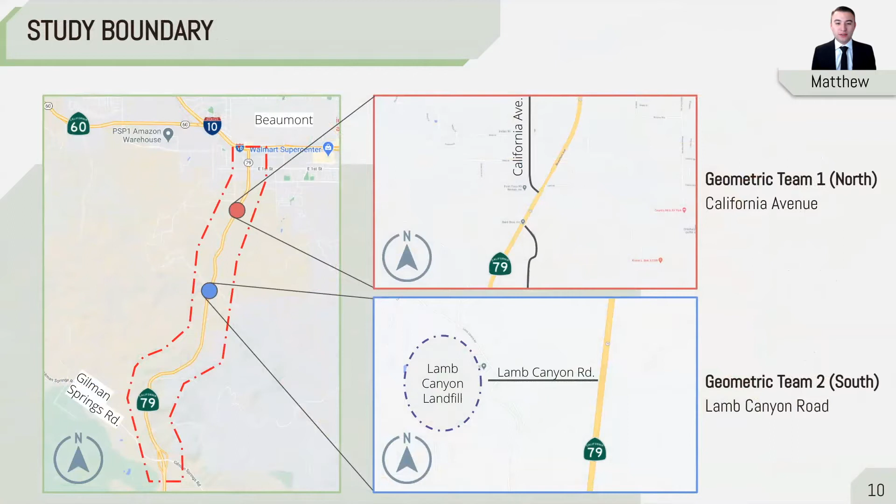More specifically, our study boundary is from East 1st Street to Gilman Springs Road along the SR-79. Through this corridor, the project focuses on intersections at California Avenue and Lamb Canyon Road. The project scope includes identifying and analyzing existing problems in the area, also known as purpose and needs. The SR-79 corridor serves as an alternate route to neighboring freeways such as the I-215 and I-10. Considering this and the projected population growth by 2040, congestion is expected to increase. The level of service of the corridor must be better than D by 2045. Furthermore, accident rates at California Avenue and Lamb Canyon Road require safety improvements to be made. Additionally, improvements are needed to current multimodal modes of transportation and environmental impacts for wildlife.

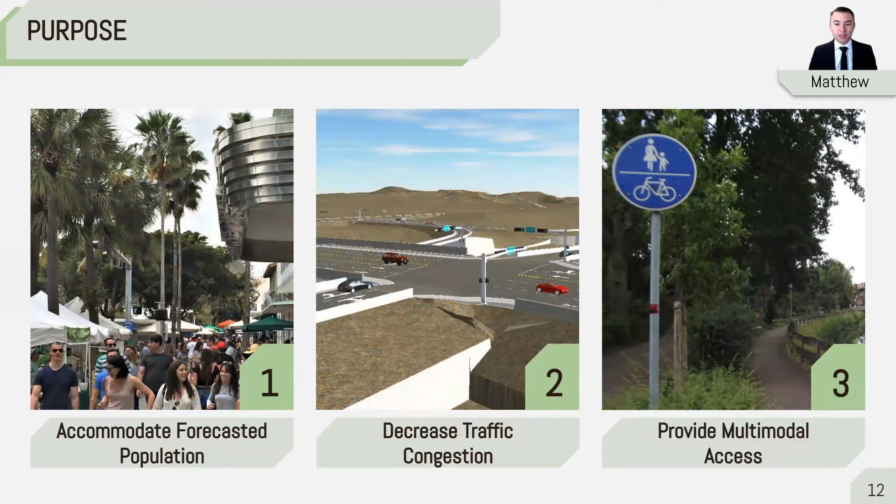Based on the needs, the purposes of this project include improvements to accessibility, capacity, and safety along the highway to better serve the cities of Beaumont, Hemet, San Jacinto, and Murrieta, thus reducing accidents along the corridor. The project also will decrease traffic congestion generated by the projected population growth in the region by 2045, as well as improve accessibility for cyclists and pedestrians along the corridor. This project also implemented different civil engineering disciplines such as surveying through digital terrain models, transportation through traffic models and simulations, as well as computer-aided drafting, structures through bridge designs, construction through our construction staging plan, and environmental considerations that Joselyn will now discuss. Thank you, Nicole.

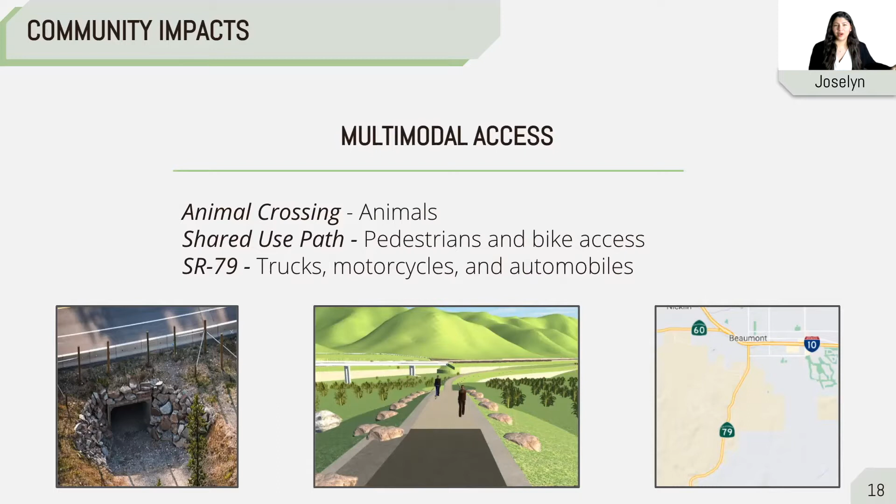The biological impacts were another component our team took into consideration when designing the SR-79 freeway conversion. Our site is surrounded by the Multiple Species Habitat Conservation Plan and PQP conserved land. Our project approximately impacts 6.1 acres of MSHCP land and 0.1 acres of PQP land. These lands provide habitats for multiple endangered and threatened animals, as well as rare plants.

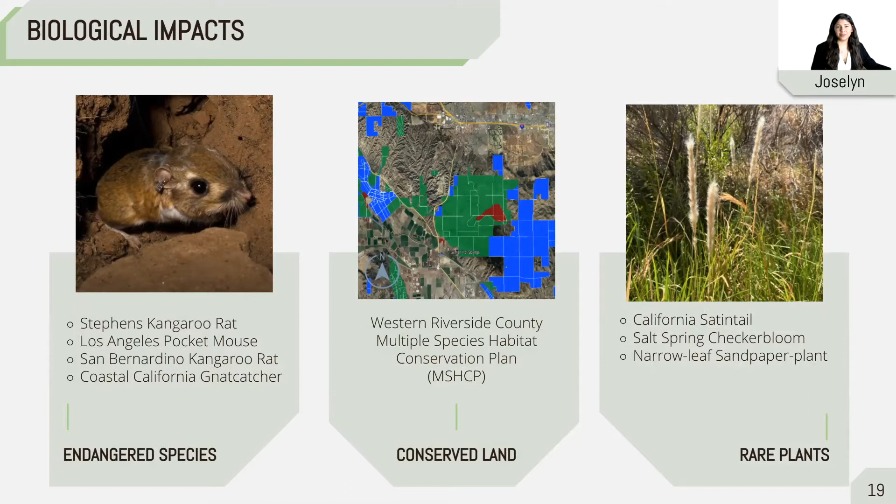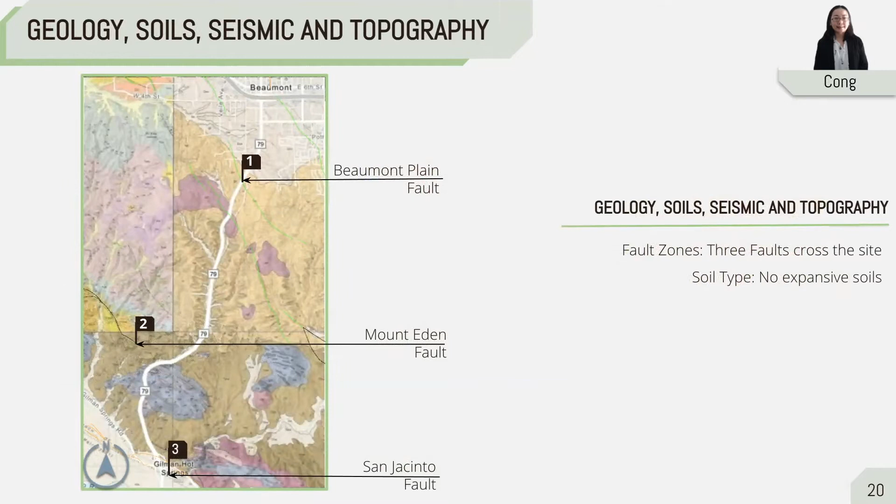Our project site consists mainly of rolling terrain. The image shows the surrounding area, soils, and fault line. No expansive soil appears to prevail around the sites. However, there are a couple of faults that appear within the sites. Therefore, we'll need to account for earthquakes in our structure designs and strengthen the existing soils.

For design aesthetics, the realignment and widening of the SR-79 through rolling terrain caused large cut and fill. Each earthwork quantity is summarized on the screen. This led our team to introduce retaining walls in areas where side slopes exceeded design requirements. Next, Joselyn will summarize our findings.

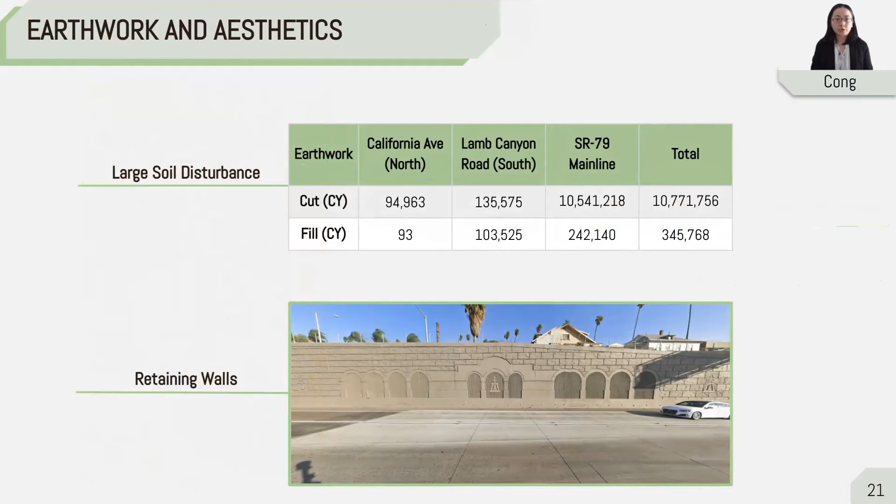Thanks, Joselyn. Before we get into the specifics of traffic analysis, we first introduce how we obtain the traffic data, parameters, and what the level of service is. The peak hour traffic volume was obtained from Caltrans traffic count sensors, the Riverside County traffic analysis model, and the Southern California Association of Governments model.

The annual growth rate for traffic volumes between 2020 and 2045 is 3.8%, which is based on the Caltrans 2017 Transportation Concept Report. The percentage of heavy vehicles on California Avenue and Lamb Canyon Road is 10.4% and 28%, respectively.

Level of service is used to determine how well a transportation facility is operating. 6 levels of service are defined from A to F, with level of service A representing the best operating conditions, and level of service F the worst. Next, Miguel will talk about the traffic analysis for existing and no-build condition.

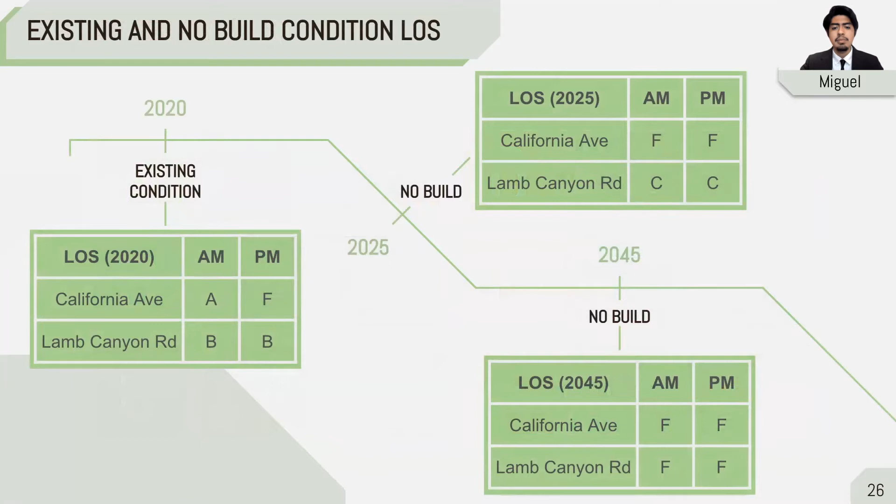This is a summary of the level of service for existing and no-build condition. Next, we will review the level of service for the existing conditions of the project. The existing geometry of State Route 79 was modeled using Synchro 10 to evaluate the current and no-build conditions for the years 2025 and 2045.

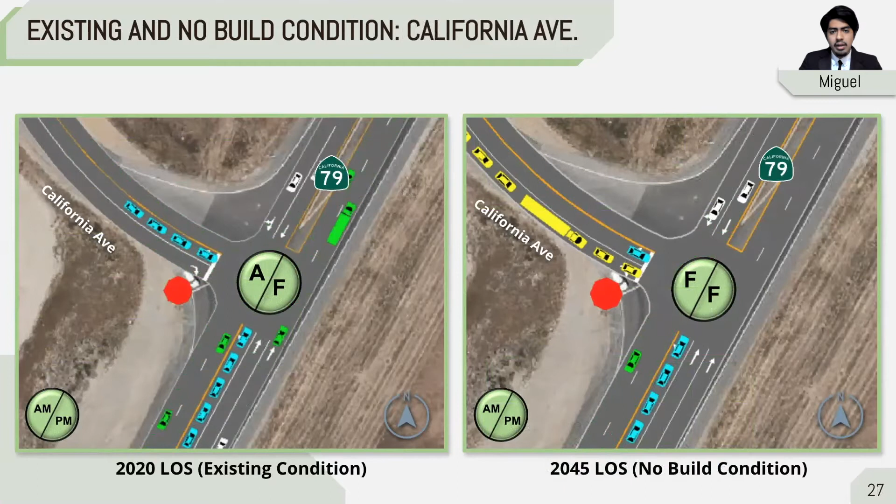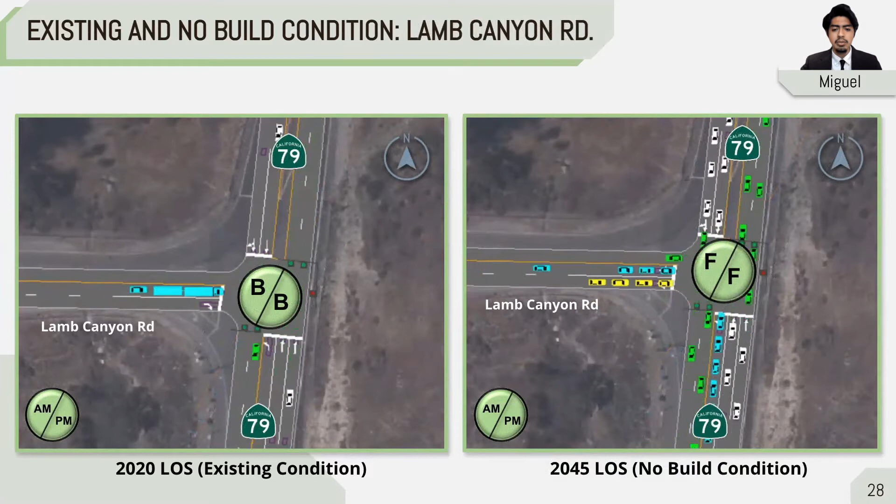The 2020 level of service was found to be A and F for California Avenue. Consequently, the 2045 level of service projection was F and F for California Avenue. For 2020, the existing intersection of Lamb Canyon Road and State Route 79 AM/PM level of service are B and B. Additionally, the 2045 AM/PM level of service projection was F and F for Lamb Canyon Road. Caesar and Ben will now discuss the geometric alternatives.

After environmental and traffic analysis, our geometric teams were able to develop feasible design alternatives for each interchange. We used design standards from the Highway Design Manual to ensure the safety of our designs, received industry guidance for best practices to improve our alternatives, and used professional programs such as MicroStation and InRoads to draft our designs.

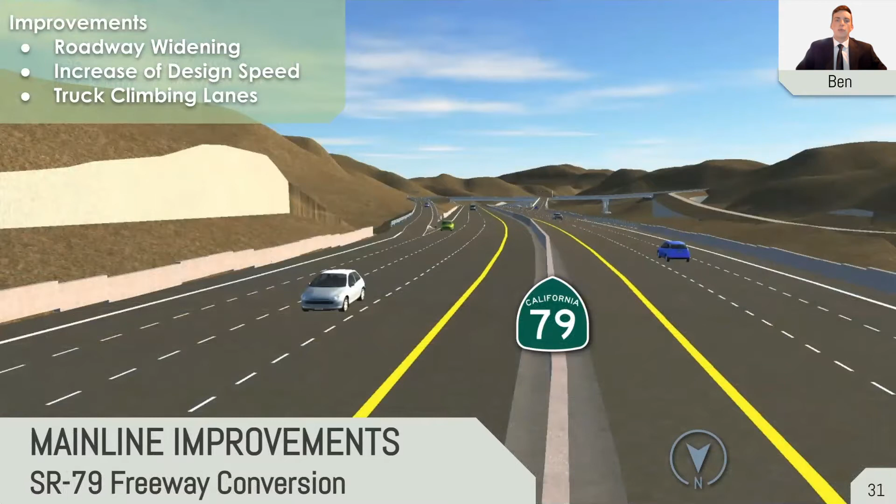This project will improve State Route 79 by converting it from a highway to an access-controlled freeway. We widened the roadway with the addition of 1 lane in each direction, increasing the capacity of the facility. We also realigned the 79 both horizontally and vertically so that the design speed of the roadway, according to current Caltrans design standards, is increased from 55 to 70 miles per hour. Finally, we added a truck climbing lane along portions of the northbound 79 where the grade exceeds 2%.

Our team developed and designed 3 alternatives for the northern interchange at California Avenue and State Route 79. We designed each alternative with California Avenue as an overcrossing to State Route 79 while providing access for cars, bicycles, and pedestrians along California Avenue.

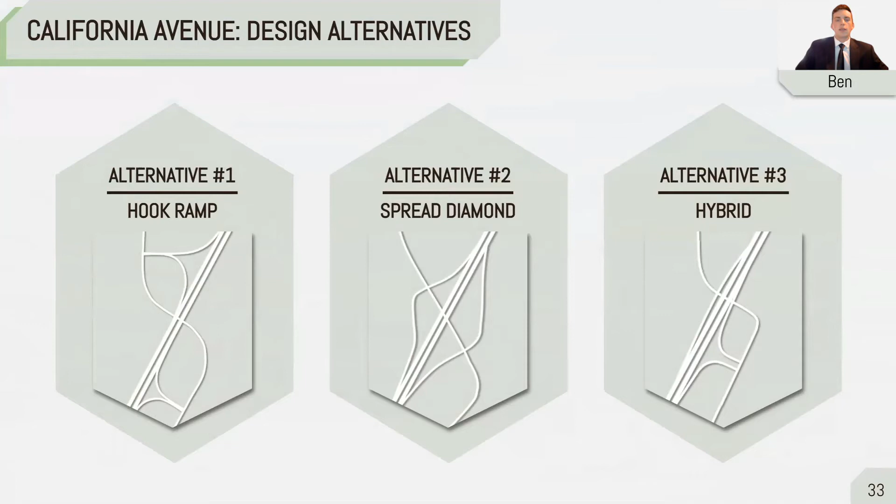Our first alternative is a hook ramp interchange. Our second alternative is a spread diamond, and our last alternative is a hybrid interchange incorporating elements of both the hook ramps and diamond design. I'll now pass it over to Nicole to discuss our first alternative. Our first alternative is the hook ramp interchange.

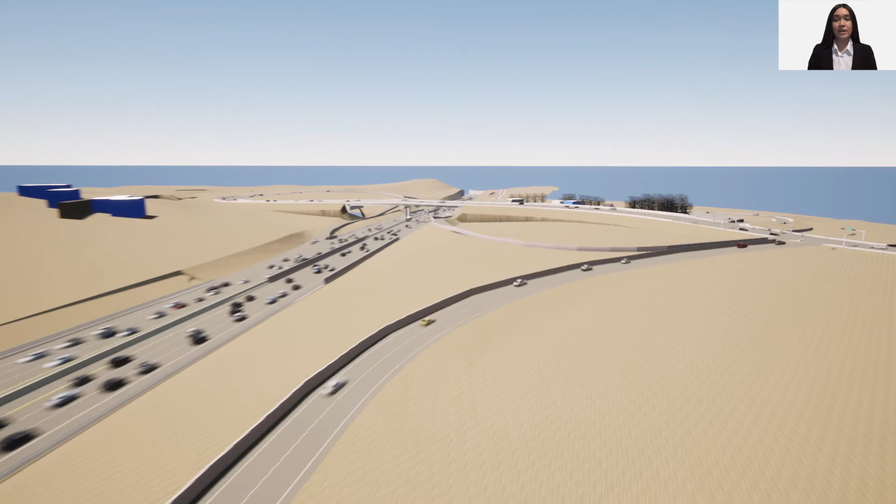The hook ramps interchange is generally designed when the freeway alignment runs parallel to the streets. In our design, only the southern portion of California Avenue runs parallel to State Route 79, while the northern portion maintains a 30-degree skewed angle. The proposed 4-lane bridge on California Avenue is designed nearly perpendicular to the 79, which minimizes the structure's cost. However, the hook ramp's design incorporates more drastic curves on the ramps than other designs.

The hook ramp alternative has 2 intersections and 4 ramps. For 2025, the southbound intersection AM and PM level of service are both A, and the northbound intersection AM and PM level of service are A and B. For 2045, the southbound intersection AM and PM level of service are A and B, and the northbound intersection AM and PM level of service are both B.

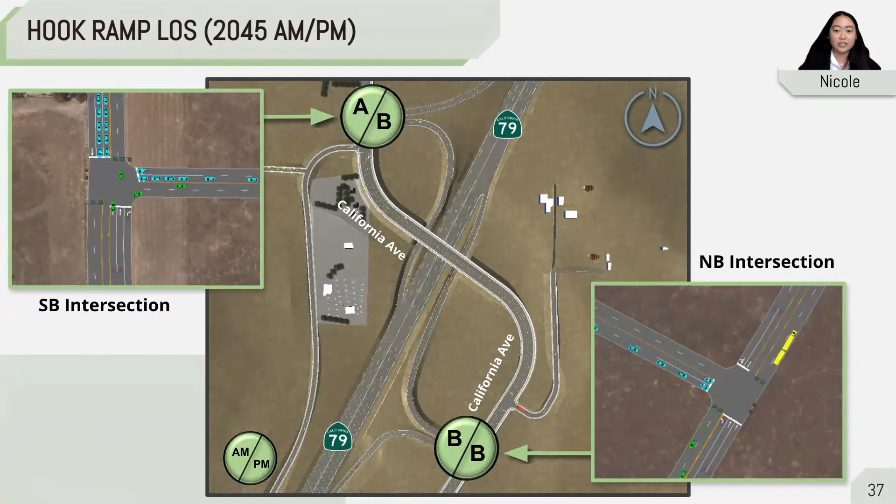For 2025, the southbound intersection AM and PM level of service are both A. The northbound intersection AM and PM level of service are both A as well. For 2045, the southbound intersection AM and PM level of service are B and C. The northbound intersection AM and PM level of service are both B.

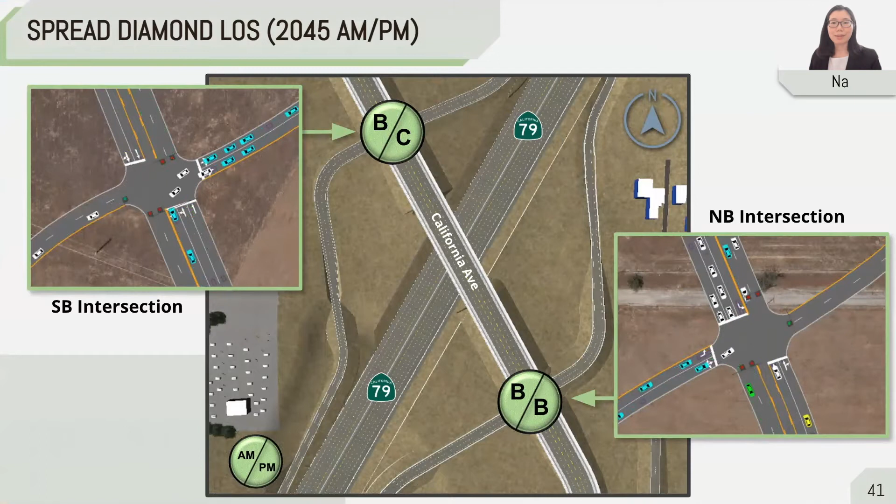Next, Miguel will talk about the hybrid alternative. Our third alternative is a hybrid interchange. This consists of hook ramps for the northbound ramps and a tight diamond for the southbound ramps. This alternative seeks to incorporate the near perpendicular bridge of the hook ramp alternative to decrease the structure's cost, along with diamond ramps on the western side of State Route 79 to minimize the right-of-way and environmental impact. However, this design doesn't meet drivers' expectations as well as the other 2 alternatives. This is due to the different types of ramps being implemented on each side of the bridge.

The hybrid interchange design has 2 intersections. For 2025, the southbound intersection AM and PM level of service are both B. The northbound intersection AM and PM level of service are both B as well. For 2045, the southbound intersection AM and PM level of service are B and B. The northbound intersection AM and PM level of service are both B.

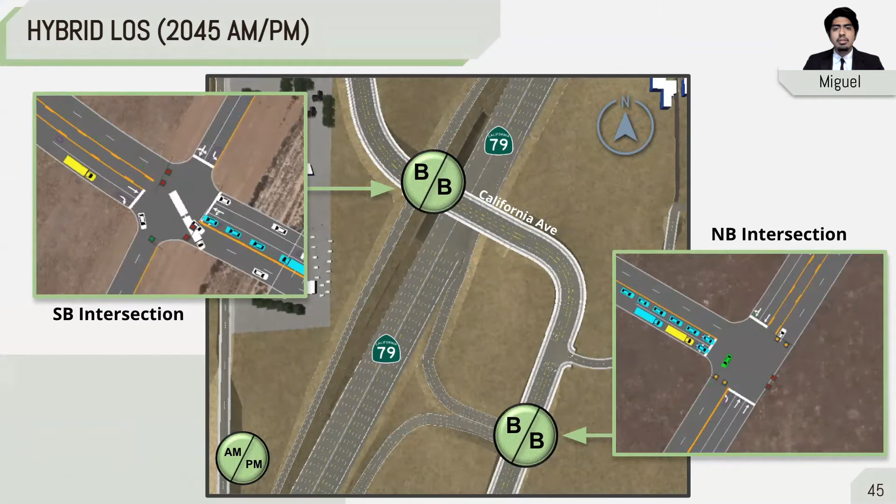Cesar will now discuss the Lamb Canyon design alternatives. Our team designed 3 alternatives for the interchange at Lamb Canyon Road and State Route 79, as well as a shared use path from Lamb Canyon Trailhead 1 to Gilman Springs Road. Our first alternative is a tight diamond. Our second alternative is a spread diamond hybrid, and our third alternative is a trumpet. I'll now pass it on to Arodi to discuss our first alternative.

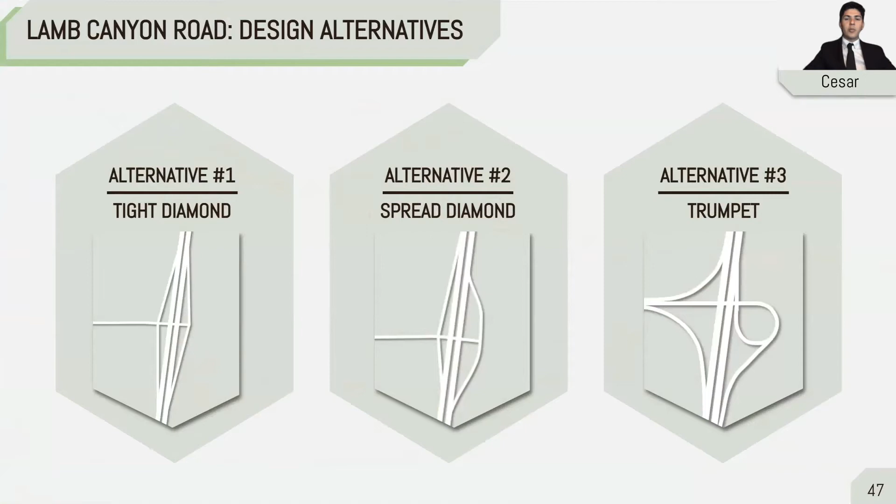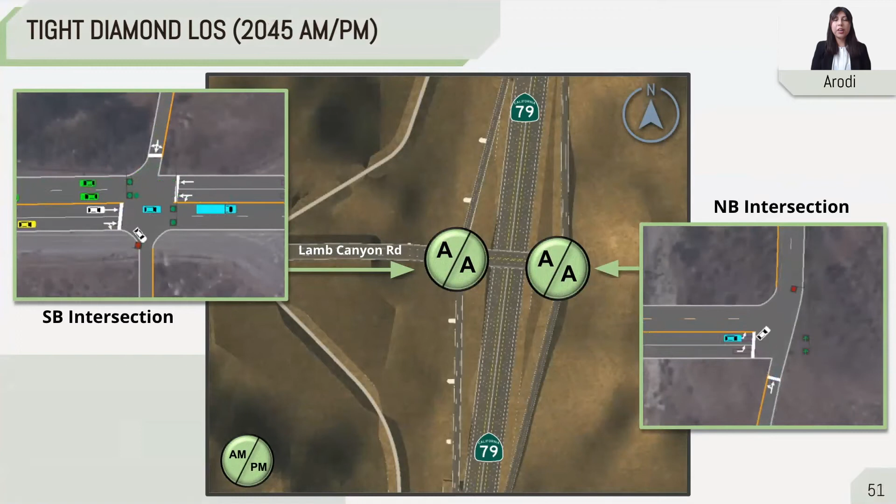The tight diamond is an alternative that meets driver expectations and requires minimum construction cost. It also allows for construction within limited right-of-way areas. It is a common, simple design alternative that provides familiarity to constructors. One challenge with this design, however, is that it can be difficult for future expansion. The southbound intersection AM and PM level of service are both A. The northbound intersection AM and PM level of service are also both A. For 2045, the southbound intersection AM and PM level of service are both A. The northbound intersection AM and PM level of service are both A as well.

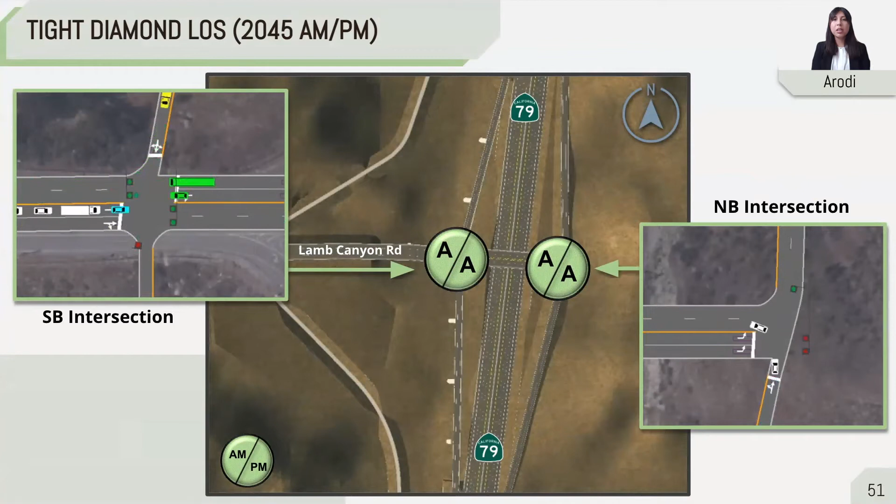Next, Raymond will discuss the spread diamond hybrid. The spread diamond hybrid has multiple advantages. The newly designed intersection allows for improved traffic flow due to added left turn movements on the northbound on-ramp. The interchange meets drivers' expectations and improves access to SR-79 by utilizing on and off ramps connecting to Lamb Canyon Road on the east and west sides. Cons to the spread diamond hybrid would be the limitations of expansion or widening on the northbound on-ramp due to the environmental constraints and mainline boundaries.

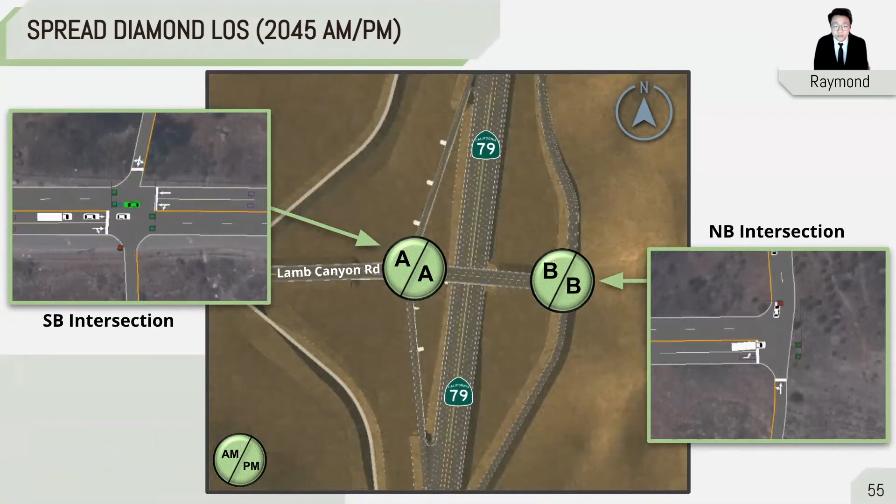The spread diamond alternative at Lamb Canyon Road will have two intersections and provide access to State Route 79 through the north and southbound ramps. Both intersections received an AM and PM level of service of A and A for 2025 traffic conditions. For the AM and PM 2045 traffic conditions, the southbound intersection received a level of service of A and A, while the northbound intersection received a level of service of B and B.

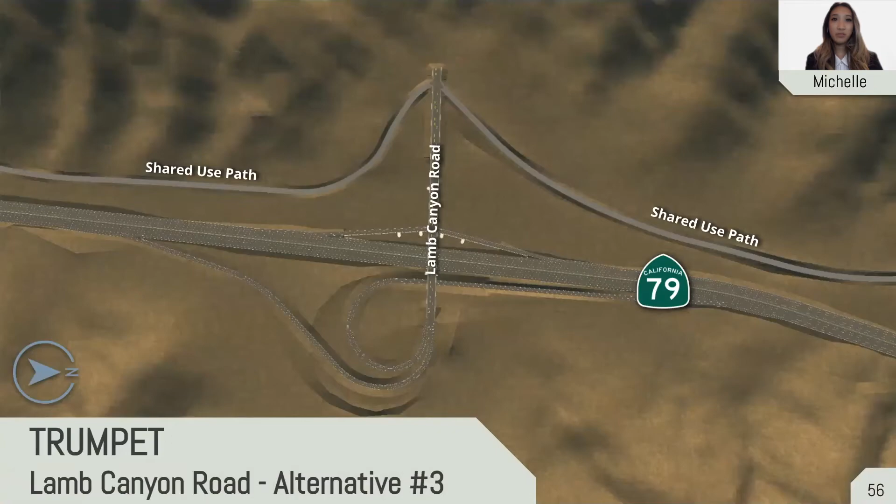Next, Michelle will discuss the trumpet alternative. The trumpet hybrid alternative consists of loop ramps on the northbound and a tight diamond design on the southbound side. Trumpets are most useful when implemented on three-legged interchanges where most traffic on the terminating highway is going the same direction. This trumpet design has free-flowing traffic in the northbound direction. However, a drawback can be that it is hard to expand on if needed in the future and that the loops require a lot of right-of-way acquisition.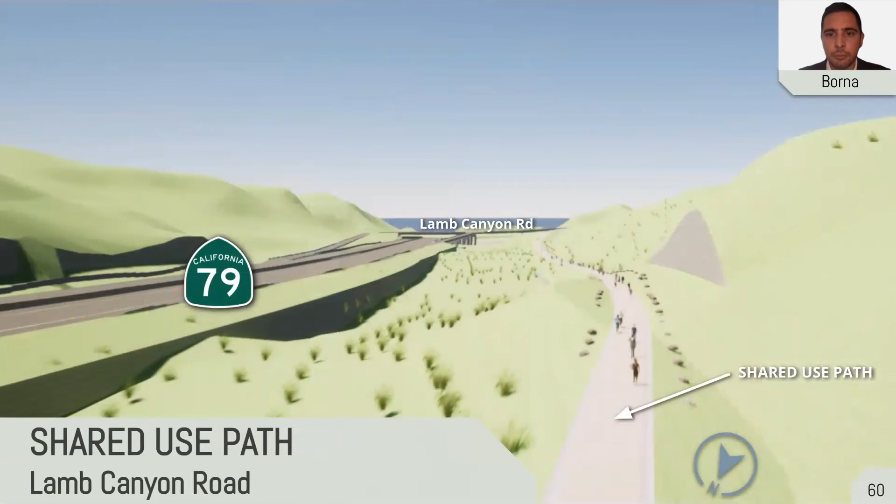A shared use path serves as part of a transportation circulation system and supports multiple recreation opportunities such as walking and bicycling. Due to the upcoming development of Beaumont and San Jacinto, the path would provide accessibility and ease of multimodal transportation between the two cities through Lamb Canyon. Currently, the existing condition does not provide a direct path accessible for pedestrians and bicyclists.

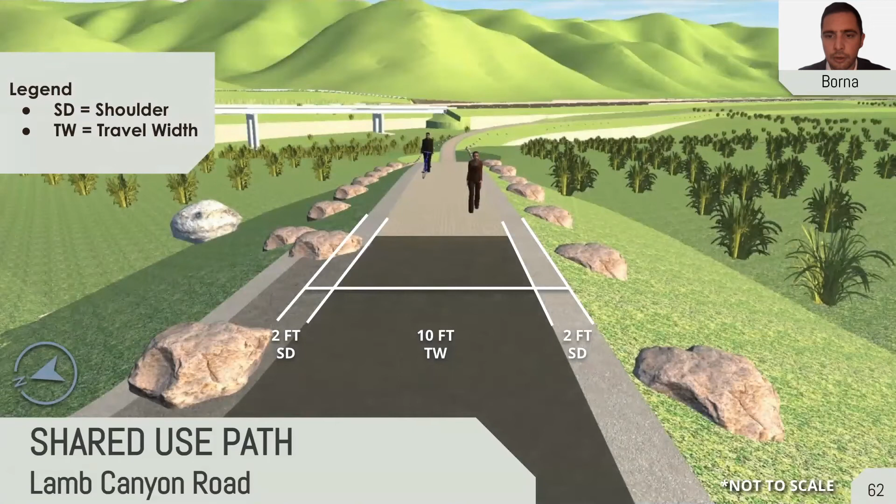The 10-foot wide, 3.2-mile long path extends from the Lamb Canyon trailhead just north of Lamb Canyon Road to Gilman Springs Road, parallel to SR-79. It will have a 5-foot travel lane in each direction with grade variations of 2 to 10%. Now I will turn it back to Nicole to discuss the benefit-cost ratio.

Thank you, Borna. The benefit-cost ratio is determined by the quantified benefits and costs of each alternative. The benefits of this project were calculated based on values for total vehicle delay reduction, total vehicle stop reduction, fuel consumption reduction, and emissions reduction for each alternative. These values were taken from the Synchro reports and calculated accordingly.

Furthermore, a cost estimate analysis was conducted based on the items shown here. The cost of each of these items was calculated for the current year cost and escalated to the project opening year cost. Based on these quantified values for benefit and cost for each alternative, the team was able to consider this in the decision matrix.

The weighted decision matrix for this project was created by the project development team in order to prevent selection bias when deciding our preferred alternatives at California Avenue and Lamb Canyon Road. The 10 categories included input from environmental, traffic, and geometric teams, and are ranked based on the following order in the slide. Our team then unanimously scored each alternative based on our project findings and our purpose and needs statement.

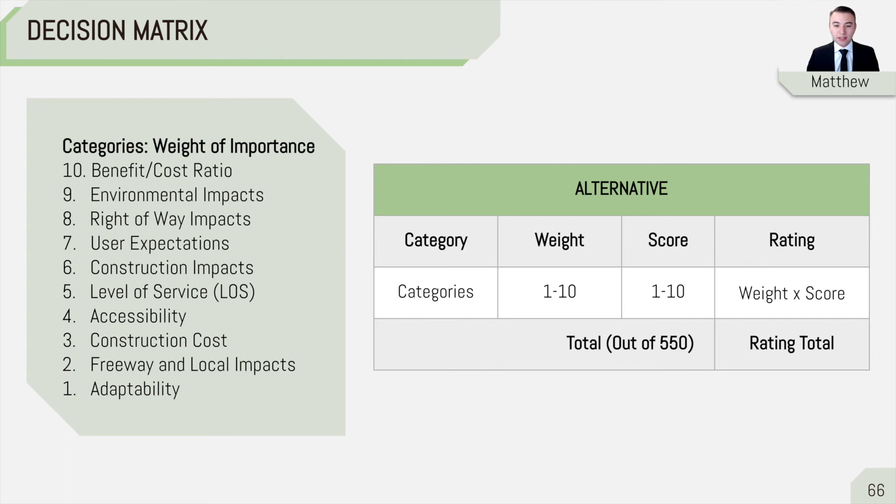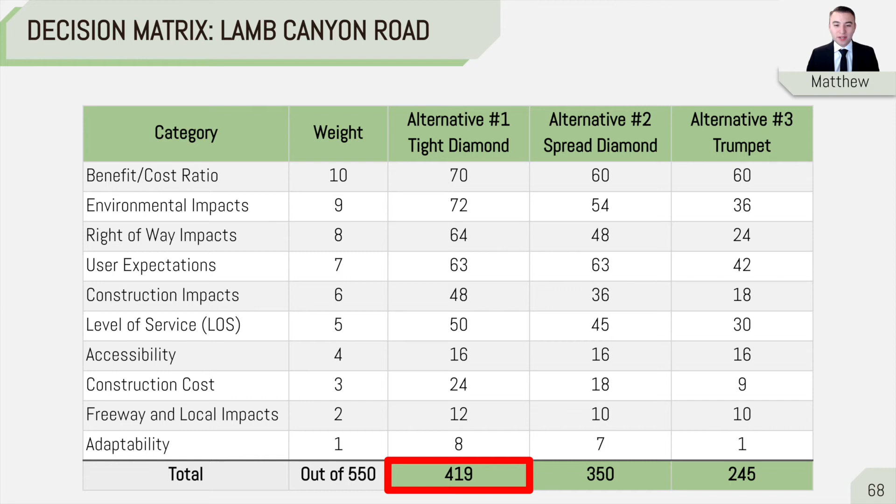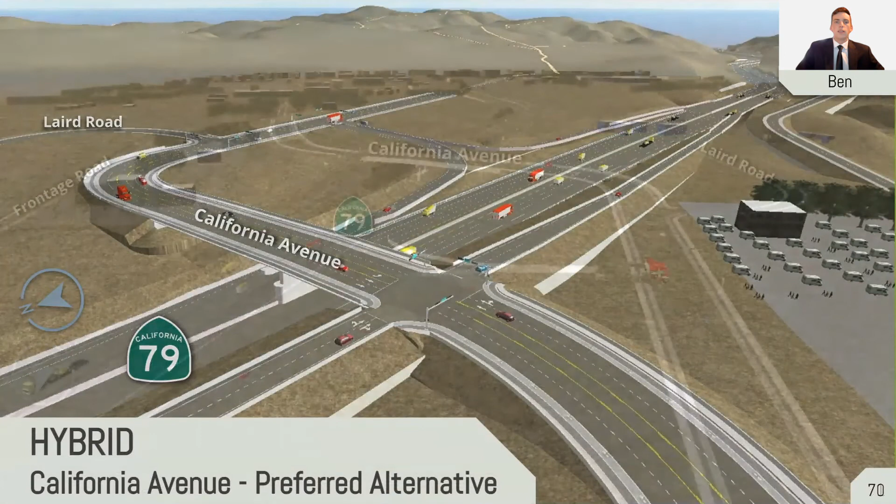The hybrid interchange was selected as the preferred alternative for California Avenue. This alternative best met the purpose and need of the project while also having the lowest construction cost and greatest benefit-cost ratio. The hybrid design also had a lower impact on right-of-way and environmental concerns. These factors led us to select the hybrid design as the preferred alternative.

For Lamb Canyon Road, our preferred alternative was the tight diamond. This alternative best met the purpose and need of our project. It impacted the conservation land the least while also having the greatest benefit-cost ratio and has the best level of service. I will now pass it on to Dean and Douglas to discuss the roadway sections of the main line as well as our preferred alternatives.

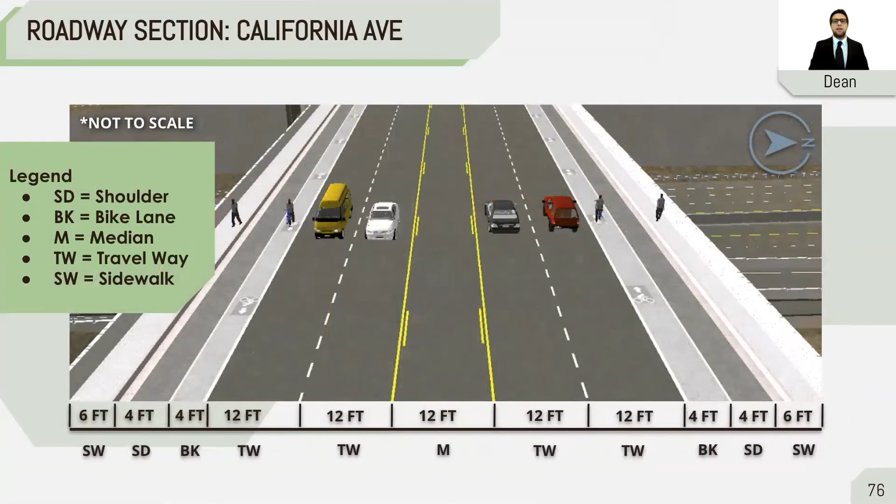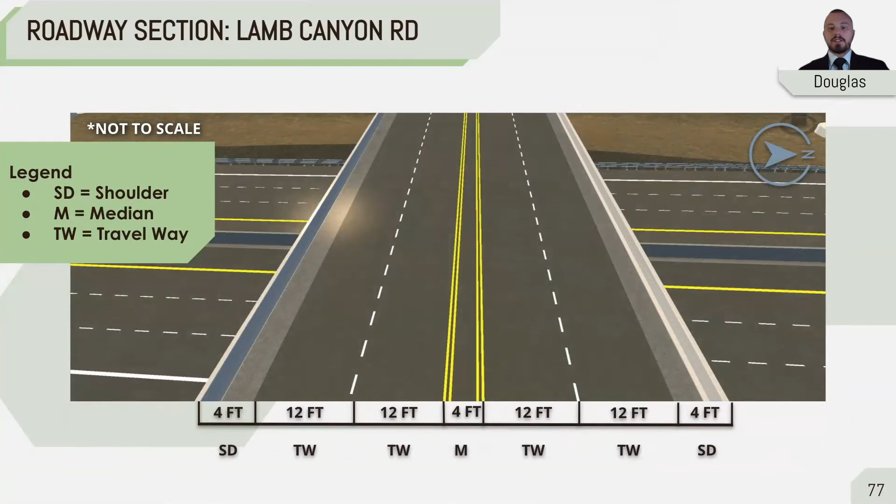California Avenue will have 2 12-foot travel lanes in each direction and a median left turn lane. Bike lanes are included on both sides of the roadway. The roadway section of Lamb Canyon Bridge consists of a 4-foot shoulder and 2 12-foot travel lanes each direction. There is a 4-foot median separating the east and westbound traffic lanes. Now I'll pass it on to Asif to cover the advanced planning study.

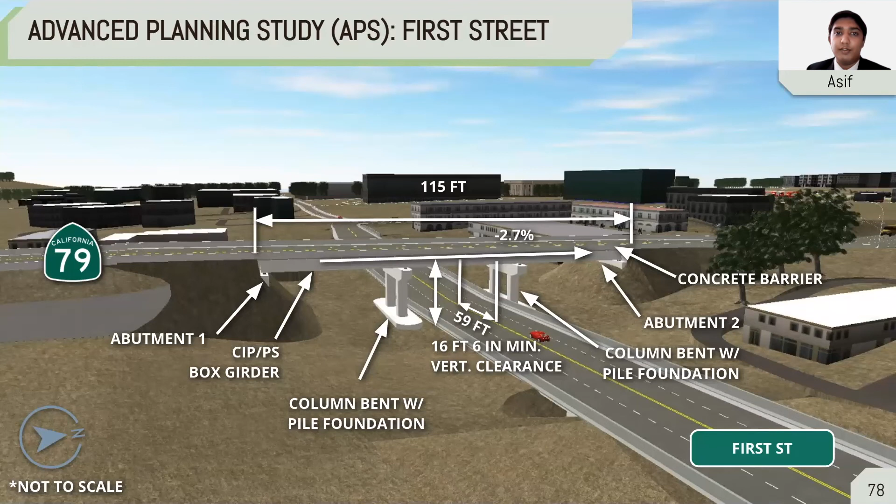The bridge structure would contain cast-in-place box girders supported by column bent with pile foundation on both sides of First Street. On each side would be an abutment as well. The minimum vertical clearance of this bridge is 16 feet 6 inches above First Street. The bridge dimensions would be 115 feet long and 59 feet wide. Next, we will discuss the California Avenue Bridge.

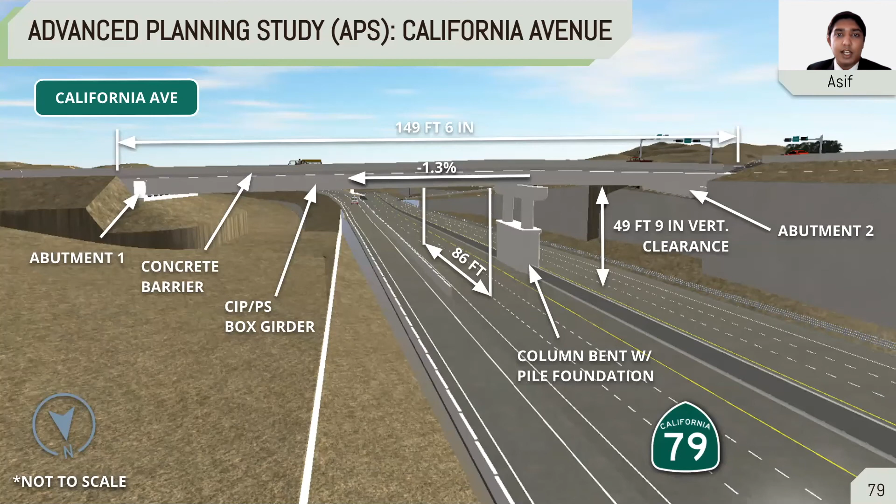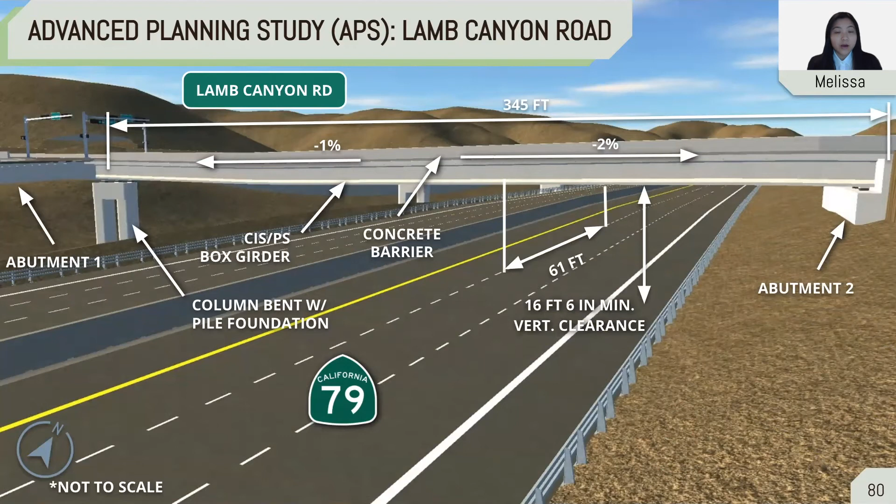An advanced planning study was conducted for the Lamb Canyon Bridge, as well as the southbound on and off ramps. All proposed structures would have cast-in-place box girders supported by a column bent with a pile foundation. The bridge dimensions are 345 feet long and 61 feet wide. Now I will pass it on to Jocelyn to discuss construction staging.

Thank you, Melissa. The SR-79 freeway conversion consists of 6 construction phases. The order of these phases were chosen to minimize the impacts to traffic, the surrounding communities, and the overall cost of the project. Before zooming into each phase, let's take a closer look at the screen to get familiar with how the phases are divided.

The first 3 phases involve changes to the northern portion of our project, from First Street to a meeting point 2 miles away from California Avenue. Phase 4 through 6 involve the changes from the meeting point to Gilman Springs Road. Let's take a closer look at each phase.

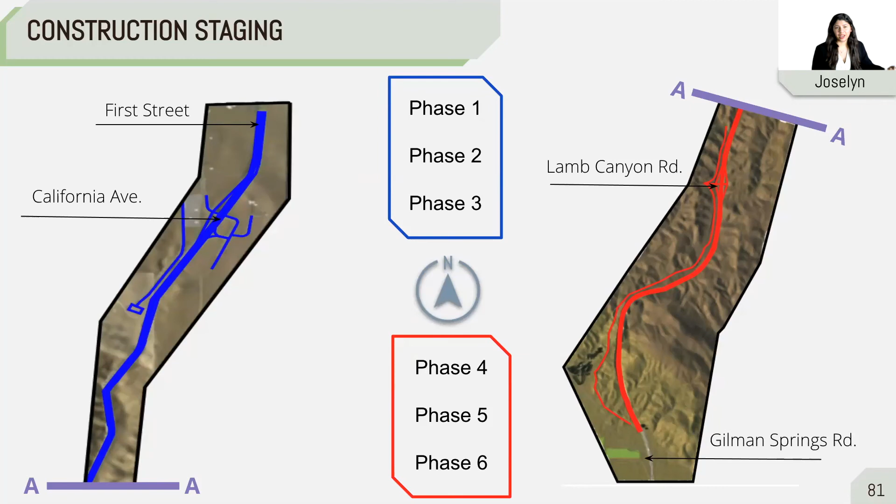Phase 1 consists of the realignment and expansion of the existing northbound lanes from 2 lanes to 3 lanes from California Avenue to approximately 2 miles south of California Avenue. In addition, the construction of the east side on and off ramp, as well as the start of the California Avenue bridge construction will take place. Lastly, the construction of Laird Road will also occur during this phase.

Phase 2 consists of the realignment and expansion of the existing southbound lanes from 2 lanes to 3 lanes from California Avenue to approximately 2 miles south of California Avenue. The construction of the west side on and off ramp, as well as the end of the California bridge construction, will take place. Lastly, the access and frontage road will be constructed on the west side as well.

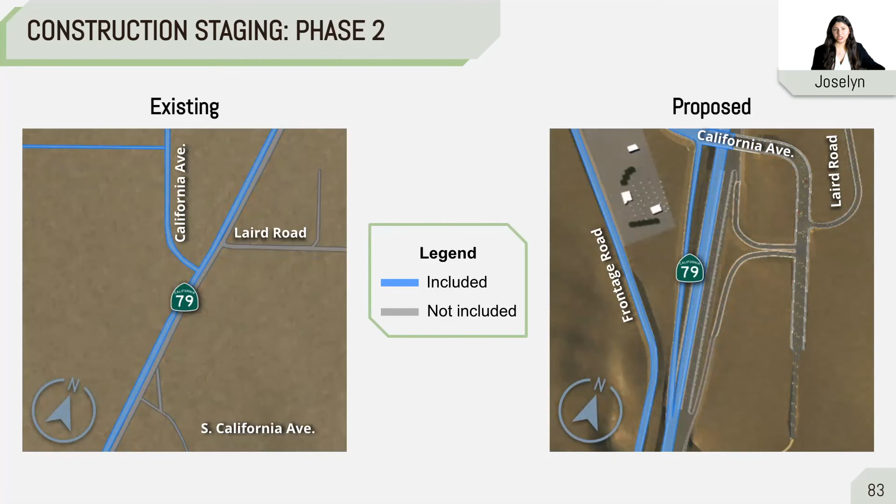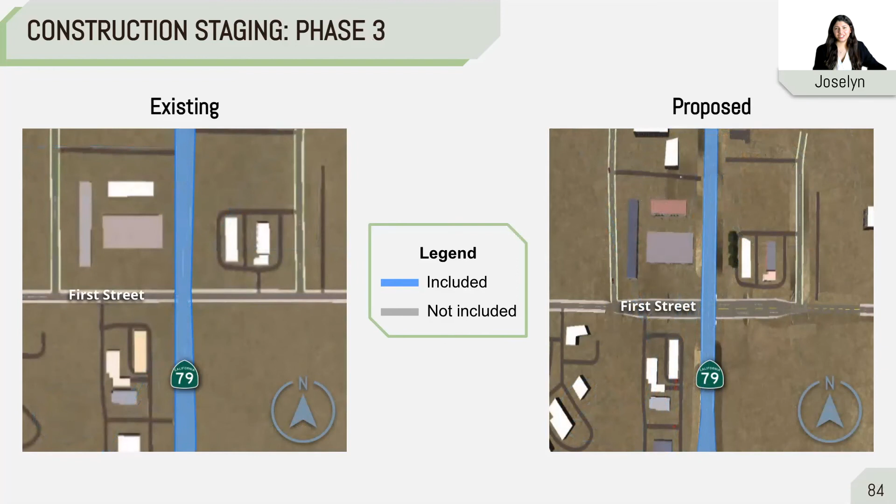Phase 3 consists of the bridge construction at First Street, as well as the realignment and expansion of the lanes from First Street to California Avenue. Phase 4 consists of the realignment and expansion of the existing northbound lanes from 0.5 miles north of Lamb Canyon to 2.5 miles south of Lamb Canyon. The construction of the east side on and off ramp, as well as the start of Lamb Canyon bridge construction, will occur during this phase.

Phase 5 consists of the realignment and expansion of the southbound lanes from 0.5 miles north of Lamb Canyon to 2.5 miles south of Lamb Canyon. The construction of the west side on and off ramp and the end of the Lamb Canyon bridge construction will occur. Lastly, the start of the shared use path will begin.

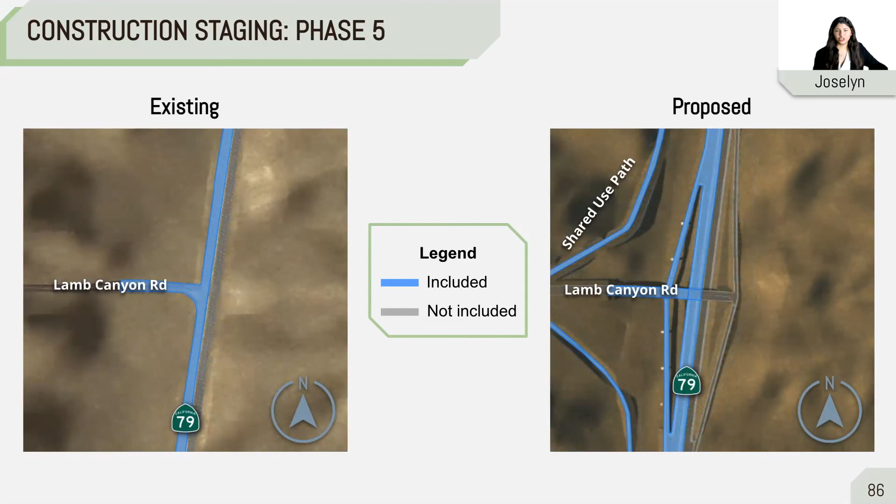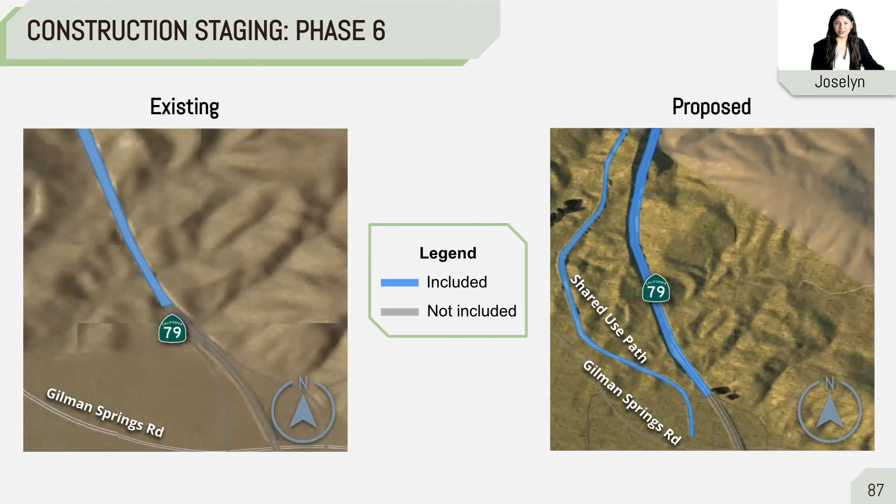Finally, phase 6 consists of the realignment and expansion of the lanes starting 2.5 miles south of Lamb Canyon to Gilman Springs Road. The end of the shared use path and the construction of the animal crossing will occur during this phase. Now, I would like to pass it over to Asif with AR/VR.

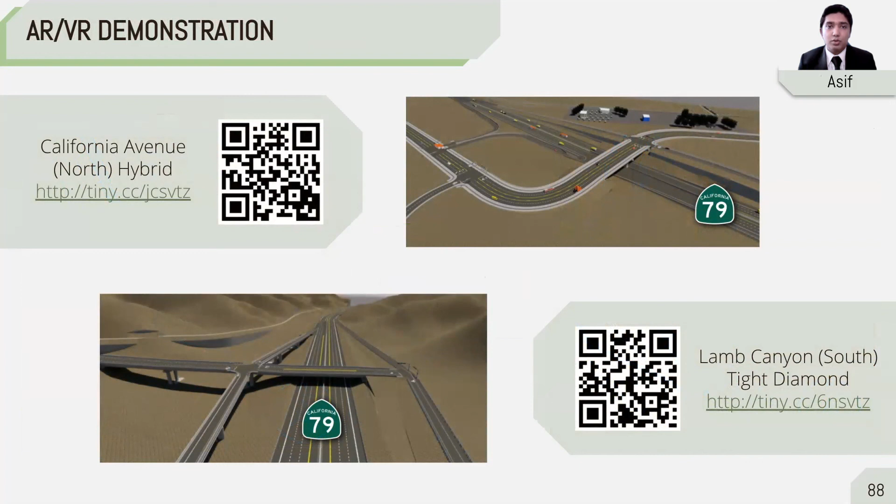Thank you, Jocelyn. For our project, the models for each alternative were created using the software Autodesk InfraWorks and aesthetically rendered using the program Twinmotion. Each model has allowed students to be fully immersed into the surrounding conditions and have a better understanding of the project in the built environment. The models can be seen using the QR codes or the links on the screen. Now I'll pass it on to Matthew to go over the website.

We now invite you to visit our project website using the link below on the screen. Our project website contains all of our geometric alternatives, environmental considerations, traffic analysis, and project documents, along with AR/VR content that you can view after this presentation.